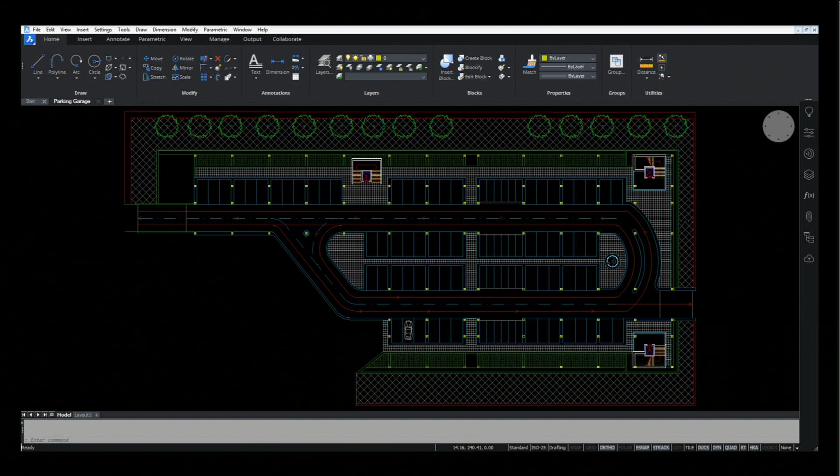It's dark, isn't it? Yep, dark UI, far and away the number one. Yes. I am a fan, I was one of the guys asking for that. Yeah, what we heard is, wow that's really white, or can you turn down the brightness? Your request is our command.

So you'll be seeing this demonstrated as Heidi and Hans jump in, you'll actually be seeing it in action. Other things we heard was that from an interface and workspace point of view, people wanted a familiar, easy to implement, easy to learn, and acclimate-to user environment. We're aware that a lot of people coming to BricsCAD are coming from other programs, so we want to make that transition simple. So Heidi was really a huge advocate for getting the new workspace environment set up and the different ribbon arrangements, and she'll be showing you that as she toggles through her demo. We really listened to that, implemented a new quick access toolbar, a new startup launcher, and a much more discoverable and easy to control quad input so that new users can be just as at home with it immediately as experienced users who already understand the quad.

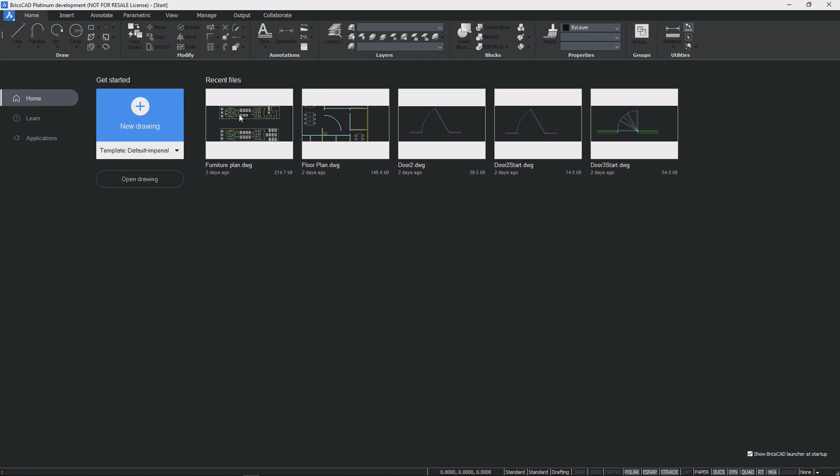I'll just go ahead and open up a drawing and take a look through the interface. As Robert mentioned, we've got the Quick Access toolbar up here, and this has the most frequently used tools that you will use regardless of which workspace you're working in. So a lot of just commonly used tools up there. And below that, you'll see the ribbon. So this is the default drafting ribbon, but we really have a default workspace for any of the environments that you work in. We want to make it easy.

One of the things that we learned from customers is that most of you are working in 2D right now. A lot of people still work in 2D, but you want to go to 3D and you want to go to BIM. So what we did is make it as easy as possible for you to move from 2D to 3D to BIM or mechanical. And what you see here again is the drafting workspace with all those 2D tools that you have in a core BricsCAD

classic license. But very easily, if you switch over to a modeling workspace, you'll see that you have a very similar UI with access to those 3D modeling tools, in addition to the drafting tools that you still need to create a lot of the 3D profiles and that kind of content. From there, you'll notice that we have some new tabs on this workspace, the BIM and mechanical tabs. Now, if you don't have a BIM, mechanical, or ultimate license, you won't be able to use these tools.

But you can see what's available, and if you choose to upgrade, then you can migrate pretty easily from the existing tools you were used to in a modeling workspace up to BIM or mechanical by just seeing the tools that are available in addition to what you've been working with in 3D. But for an optimum workspace, we of course offer you BIM and mechanical workspaces. These are optimized for those workflows. So it looks a little bit different, but it's got the tools that you need if you want to work most efficiently either in a BIM or in a mechanical type environment.

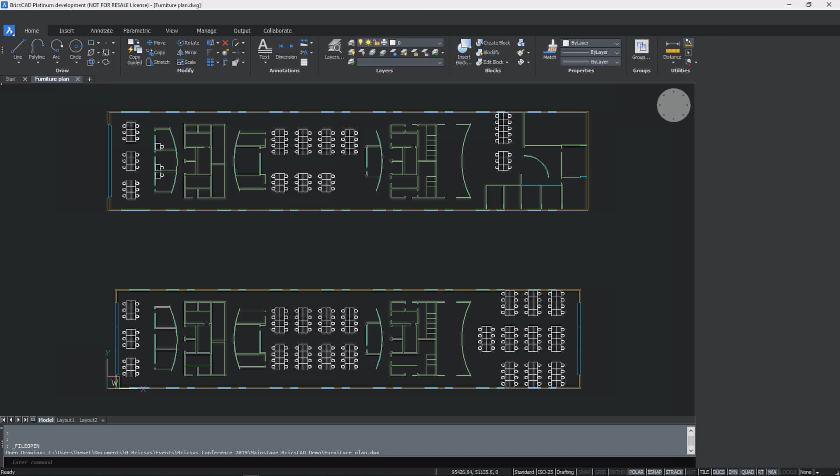By doing that, you can roll them up out of the way, easily access all of them, and really maximize your screen space. But it goes much further than that. For those of you that really want to maximize your screen space, you of course can use clean screen, turn off all your tools, and we have the wonderful quad available right there at your cursor. So this is really a heads-up design access to your tools.

They're context sensitive, so depending on the type of entity you pass over or where you are in your design or within your command, it will give you tools that are available specifically for that context. And from some users, we hear that they like the quad sometimes, but they want to turn it off easily as well when they don't need it. So we've added this little X up here; that is a huge request that we've had from users. You can just close that out and always turn it back on from the status bar.

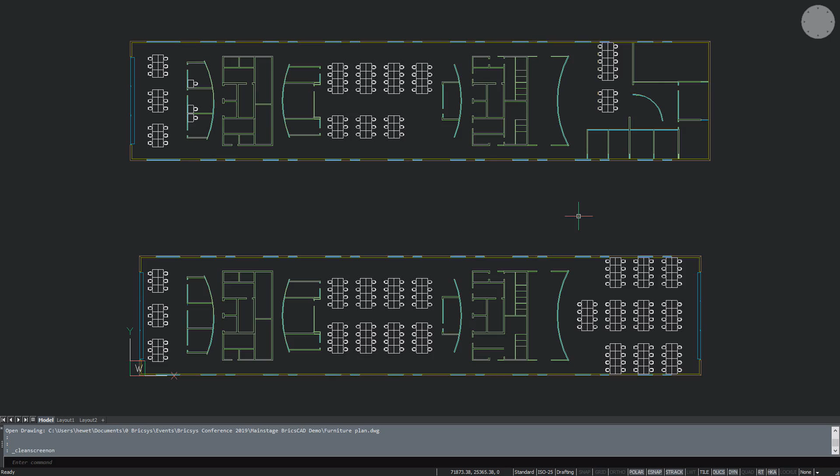So a lot of big and little enhancements that we've made, again, in response to the user feedback that we got. All right, so we'll hand it back over to Robert.

What do you guys think? Looks good.

Another thing that we heard quite a lot, and actually I think Heidi and I were kind of surprised as we went on some of the visits, is that civil engineering is a lot more important to most of our customers than we might have thought. What we heard was that whether we're moving dirt around on the surface of a construction site or moving mud around underwater in a canal or trenching something out in the North Sea, it turns out that moving dirt and computing basic volumes and having basic surface alignment capabilities and grading is something that was important to many customers. So some basic civil engineering features have been grafted into V20.

Now, is this a civil design suite? Will this allow you to design subdivisions or do analysis? No, but it does up the bar on the basic features that you'll have available to you in a BricsCAD license without any kind of verticals, without any expensive add-ons. Now, if you want to go the distance, then you need to come to the presentation that the guys from Civil Site Design are giving, because they'll show you a lot more about their solution. But at this point, I'll let Heidi show you what we've got up our sleeves for civil features. Great.

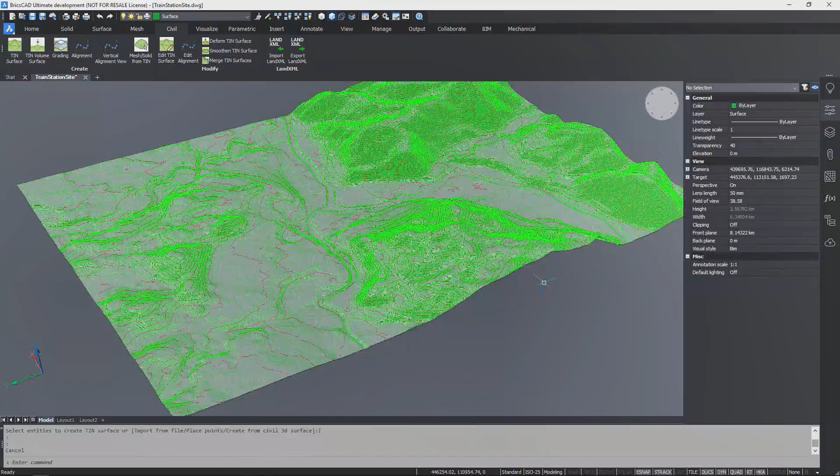So what you can do with the civil tools is you can actually create TIN surfaces. You can create those from a data file where you have all the points stored. It automatically creates the TIN surface, and you can use that for your model. There are various properties when you select that TIN surface that you can use, for example, to turn on contour lines. And then there are other tools for editing the TIN surface. In this example, what we want to do is crop the surface so that we add a boundary so that we see specifically the area that we're most interested in working on for our design.

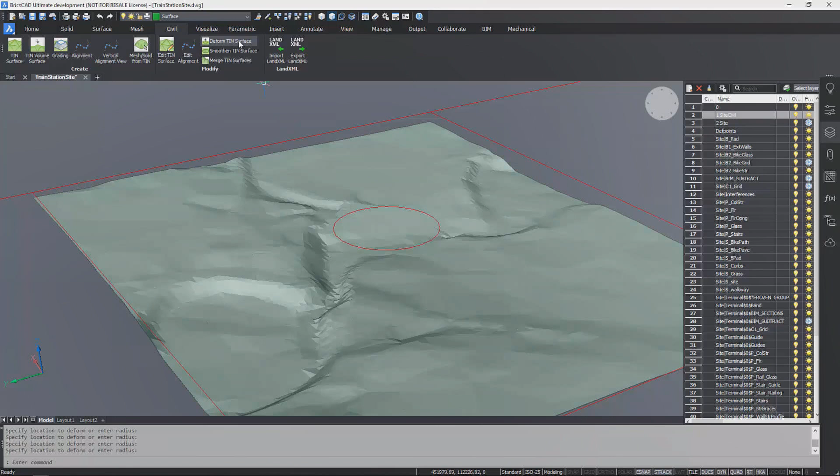Now here we're going to focus on creating a little pond in this area. So using the smoothen tool, we can very subtly smoothen out the area of our terrain to create that pond. And then we can use the deform tool, and as we specify the profile that we want and an offset for it, you can see as I pass the cursor over that it actually gives a preview of where it's going to go. So you can place it in the best spot, and then simply drag up or down to deform that surface.

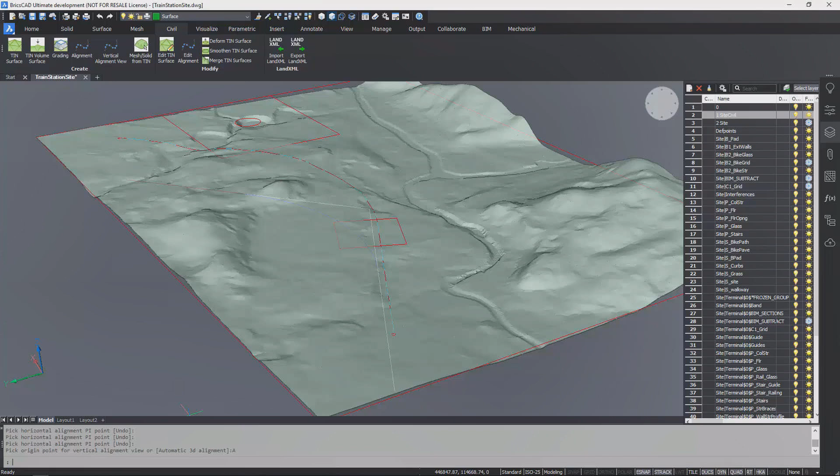There are other tools, such as the alignment tool, and in this example, what we're going to do is create a rail corridor for the train station that our architectural team is designing. And to do that, we can simply pick some key points for our alignment. By snapping to those points on our design, picking the start point, passing through our train station area and the end point, it automatically creates alignments, horizontal, vertical, and we can have it create 3D alignments automatically. Now these alignments are all linked together. So if you edit one, like the 3D alignment, the others automatically update.

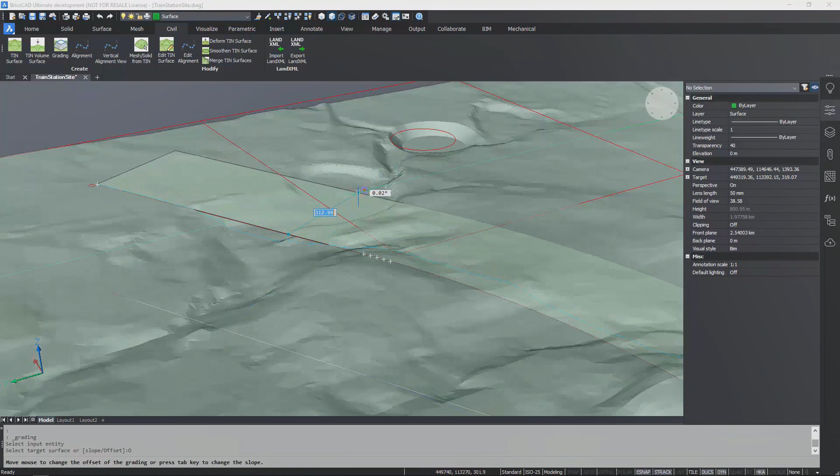And you can control various properties so that you can see and adjust the design alignment for how close it matches the terrain alignment, the actual surface alignment. Now, in this case, if we're designing a rail corridor, we probably don't want to follow the terrain too closely. We want our train ride to be smooth. So what we can do then is modify or create gradings so that our surfaces will actually be appropriate for our design. Here we're creating a grading where we offset the alignment to each side, and even as we create the gradings, we can still continue to edit our design.

We can change the shape of the alignment, and the gradings follow because they're all associated. We'll continue with the design, creating additional gradings, and we could create a grading that goes straight down from the alignment down to the terrain, but what we're going to do is actually create a grading that goes from our flat surface that we're using for the rail corridor and give it a slope that goes down to the terrain. And we'll do that on both sides.

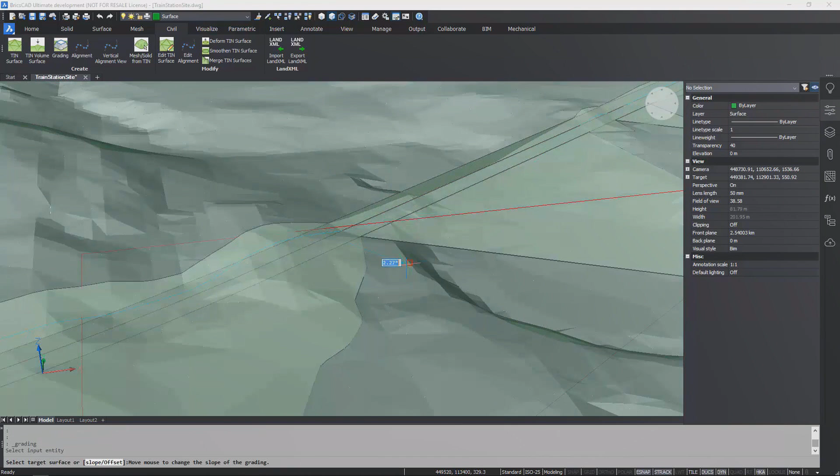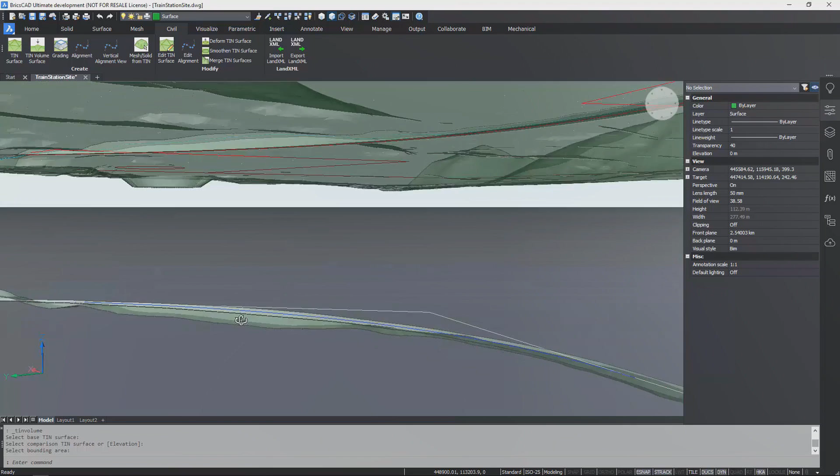And then once we have the gradings created, in this case, we can go ahead and merge those gradings together. So we have 4 different gradings all associated with the alignment. We merge them together, and then we can actually create a TIN volume surface between our design, those gradings, and the terrain. With that TIN volume surface, we can select it and look at its various properties, including the cut and fill volumes.

So a lot of power here, and this was just one example doing this rail corridor, but you can imagine using this, for example, as the platform for our building, our train station building, or many other projects, dams, and just about anything else that you could imagine in a civil type environment. And these are tools that are included with BricsCAD V20 with an Ultimate license.

Love it when the software works, right?

Another thing that we heard when we went out and talked to customers is that Heidi would always show Blockify and Parametrize, which are two of our kind of AI machine learning generation tools. And these were always very popular demos. And the feedback that we usually got was, wow, that's cool. Nobody else is doing that. That was the number one thing that was very nice to hear. And then right after that, what we heard was, what else? So what other cool things can you do? So that sounded like a challenge to us.

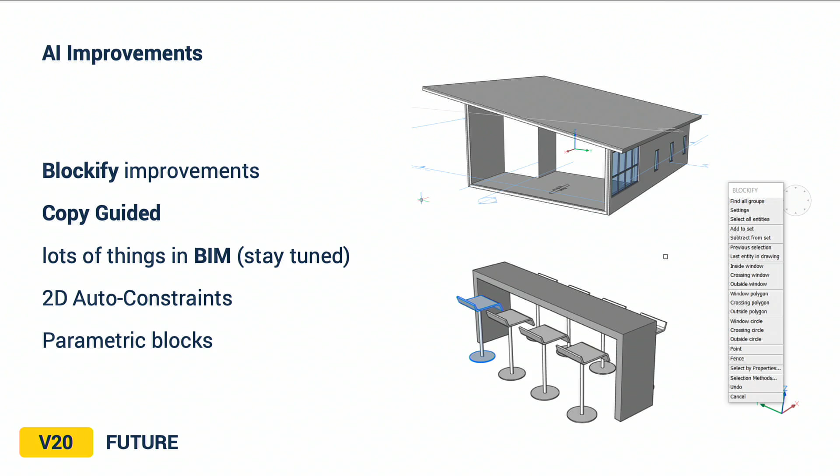Challenge accepted, right? So Heidi is going to be showing you some Blockify improvements and a new feature called Copy Guided. And we're also going to take a look at some futures, some things that we're working on. They're not all the way baked yet, but they will be pretty soon. So we want you to take a look at that. So Heidi has a couple of demos that she's going to show you. And I'll go ahead and get out of the way and let Heidi show you around.

Great, thanks, Robert. Yeah, I do want to emphasize that, as we were meeting with customers, again, many of them still work in 2D. So the 3D functionality is really cool, but we don't want to forget, and I think Eric mentioned that as well, we don't want to forget about 2D, and we want to make our users as comfortable and productive as possible. So again, from our user feedback, this is some of the things that we're able to offer with V20.

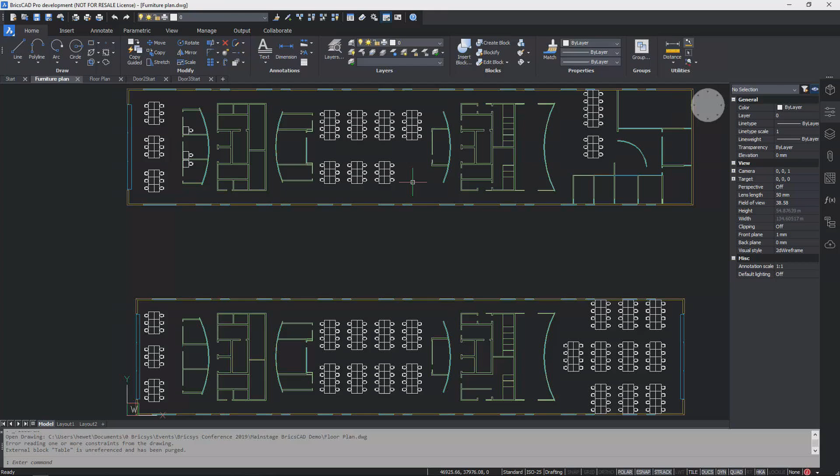In this case, I have a floor plan, and this floor plan right now has some geometry that represents desks and chairs. And if we look closely, you can see that these are individual entities. They're not blocks right now. Looking at the properties, you can see that the desk and the chair are composed of 18 different entities. If I select similar for all of those, it's over 4,000 individual little entities. So the drawing's a mess, and that's not good drawing practice.

What I'm going to do is just use Blockify and take all the defaults. So very simple for me, I don't have to think too hard. Taking the defaults now with V20, BricsCAD actually looks through the drawing database, the block database, and if it finds a block definition that matches that geometry, it automatically replaces all that geometry with those existing block definitions and instances. So really powerful functionality there. But it goes even further than that.

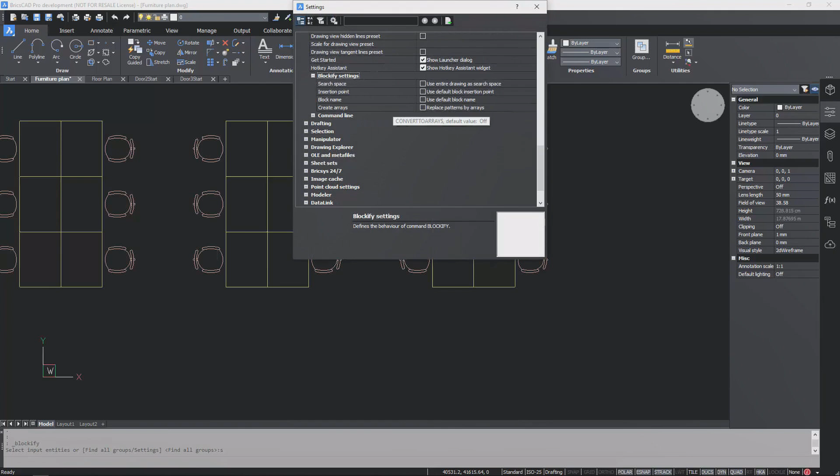Right here, now we've got these two individual blocks, the desk and the chair, that it created automatically. What we can do is use the Blockify tool again, and there's a setting in it that lets us detect patterns for arrays. So if we enable that setting, then selecting just a set of these desks and chairs, I'll just select 2 of the desks and 2 of the chairs. Doing that, and taking all the defaults from there, BricsCAD automatically goes through and looks for patterns that match those 2, and it generates arrays from there. So very quickly, it's able to find those patterns.

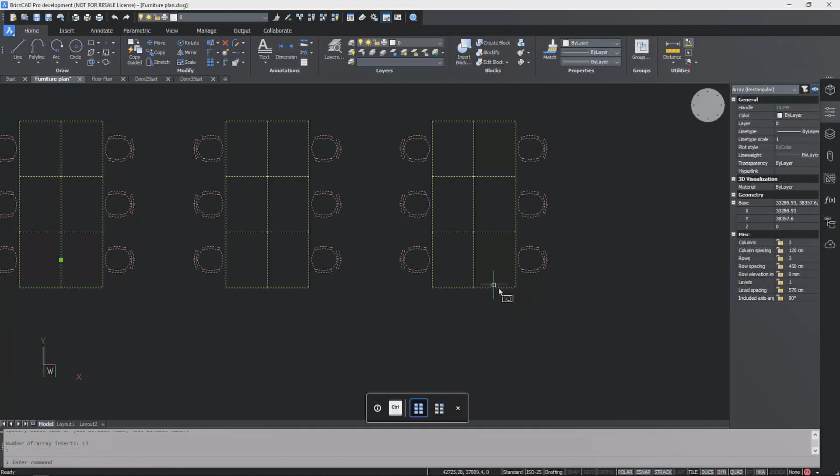If I select that, it doesn't look any different, but now I can see when I select it that it's actually an array, and it has the properties of an array, as if I had created it manually, but it did it much quicker. So I can change the values, maybe increase the number of rows and columns. And again, saving me a ton of time. If I had to clean this up all myself, it would be quite time consuming. So those are some enhancements to Blockify, which was my favorite V19 2D tool.

Now, I think in V20, one of my favorites is going to be this Copy Guided. By the name, you can tell that it's probably something to do with copying entities. And what I'm going to do is select this chair, and I want to copy it to other locations. Anything that falls within my selection window is copied, but anything that the selection window crosses is used as guidelines. So you can see here, by simply moving that chair around, it's automatically snapping to similar entities there. And it even snaps to the arc entities.

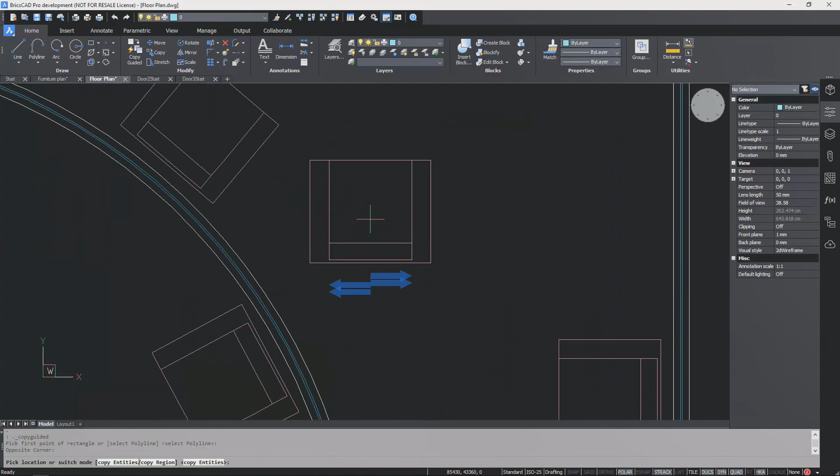Now in this case, when I created that selection, I crossed over the wall, which included 4 lines. And let me just point out, it's just lines. These are not BIM entities. These aren't walls. These are just lines. It could be in a mechanical drawing as well. But it had 4 vectors, 4 lines that it passed over. So when I try to pass it over other entities, it won't snap unless they match those same lines.

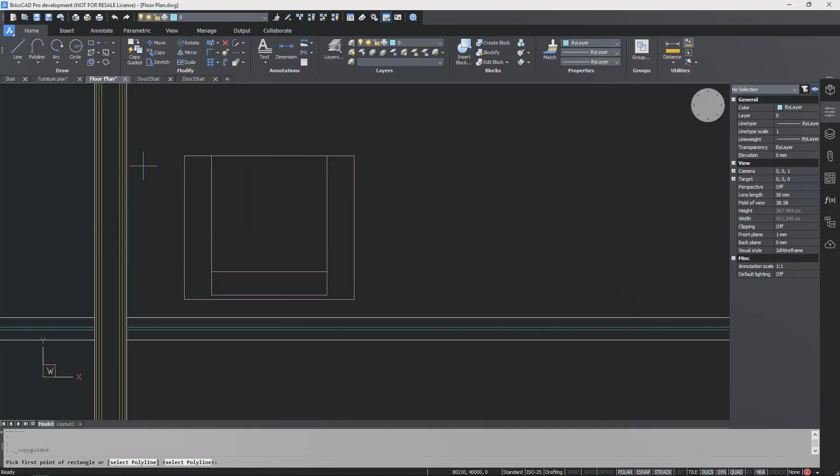But I have more flexibility if I simply select differently. In this case, I'm doing copy guided and only crossing over 1 line. Now I've got more flexibility, and any line that I pass up against, it's able to automatically snap to. So there's all kinds of things you can do with copy guided. I have to show you more examples because I was having a lot of fun with this.

So over here, we've got a door, and actually this just happens to be geometry. It's not even a block. It could be, but it's not. Using copy guided, I'll do my selection window around that door area. And again, it detects the guidelines. And as I pick to place the door, notice that it's not only copying the door, it's actually trimming the lines away automatically. Again, this is just plain old geometry. There's no intelligence. It's just geometry, okay? Which is great. That's a lot of fun.

But then, to make it even better, what if you erase those doors and now you want to repair those lines? You can use copy guided. There's a region option. So if you just select what you want to replace it with, which is, in this case, a bunch of lines, and then specify the region option, now, as I pass over that same kind of geometry again, it snaps to those guidelines, and it erases the door, and it cleans up those lines. Okay, that's pretty cool. I had a lot of fun with this.

Okay, one more example to show you. Okay, yeah, you can clap.

Okay, last example I want to show you is here we've got an opening, and on the other side of the room, we want to reproduce that opening. Using copy guided, I'm actually crossing over the corner of that room and selecting that whole opening, which again is just lines. And then notice that it's got more vectors. Now it knows that it's a corner, and it automatically snaps to a corner. Super intelligent, minimal work for me to do, no thinking involved. All right, that's copy guided.

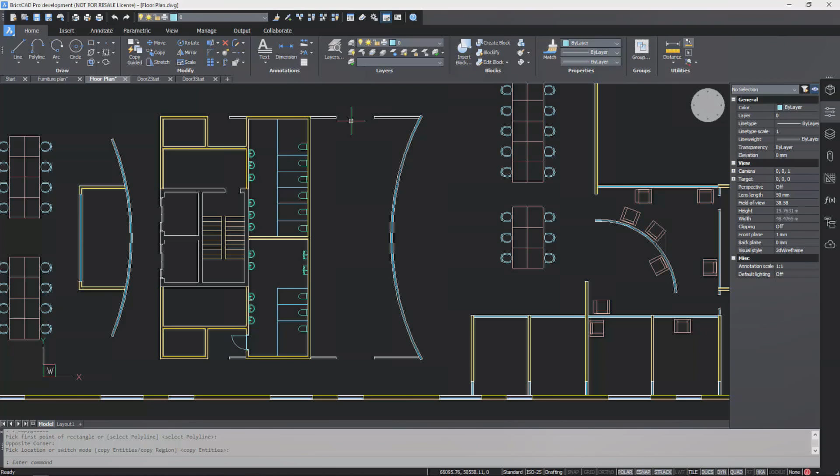So everything I showed you so far is in V20. You'll see that and have access to that very soon. The next thing I want to show you is the parametric functionality. So this is beta functionality. It's something that we're looking to in the future, not available right away with V20, but I do want to give you a look at that.

Okay, so here we've got a door symbol, the geometry to make up a door symbol. And what we want to do is just turn this into a block. Right now it's just lines, arcs, polylines, okay? So using the parametric block tool, which might look a little familiar to you, you can enter the name of the block and select the entities that you want to belong to the block. But you'll notice on the right side that there's additional tools specifically for parametrics.

What I'm going to do is select guidelines here, similar to what we saw with copy guided. And then I'm going to use the auto constrain option. Using auto constrain, it knows now, because it knows that it's got parametrics with it, it adds it automatically to the parametric block table.

In there I can either open or insert blocks from that panel. Here we can see all the parameters that it automatically added to the block definition.

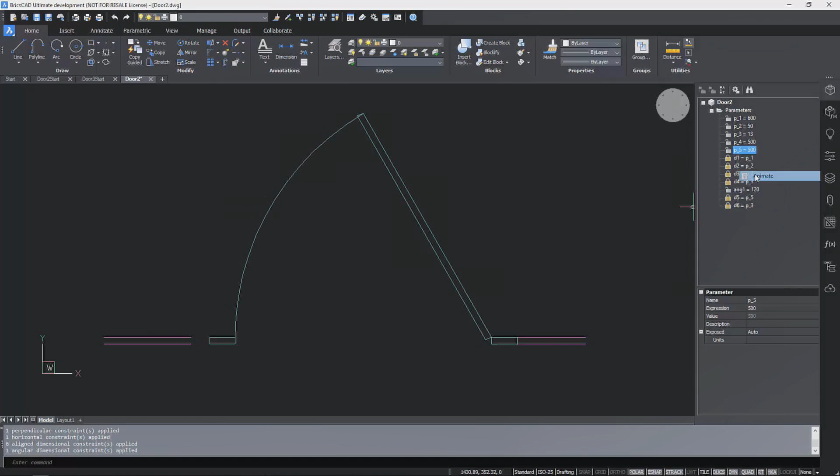And then I can animate those to see how they behave. If you look at the ends of the doors and where the door meets the guidelines, as I animate, you can see that there are actually some things that it's missing, right? It's some other parameters that are applied, and it missed the ones that I want.

You have complete control, and with the animation, it's very easy to see what you might need to add. For example, I saw that there was no perpendicularity between the ends and the sides of the door, so I add a perpendicular constraint, and then just add a fixed constraint to make sure we know a stationary point within the block. And then there's other things that I can do.

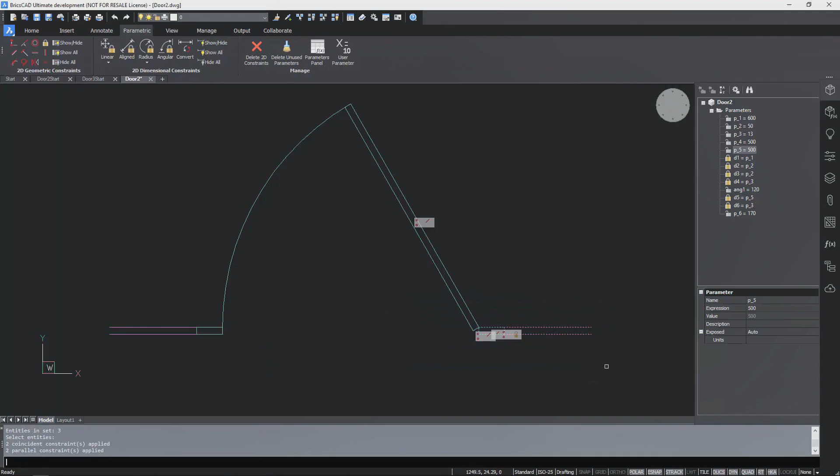I can always use the auto constrain tool and add automatic constraints again. If those constraints would over-constrain the drawing, it will give me a message that some of those constraints couldn't be applied because it would over-constrain the drawing.

You can always go through and look visually at what constraints are applied, and you can add and remove them manually. Or if you add more geometry, you can add constraints. But what's really powerful here is the ability to see these visually within the drawing as well as in the parameters list, and to be able to animate those.

You don't have to insert the block and then test it out in your drawing. You can animate it within your parameters panel and see what needs to be done.

So here we see that we're getting closer. We've got the door width working, and some of those parameters with auto constrain weren't applied until we removed some of the parameters we didn't want, and now we reuse auto constrain, and it knows enough not to apply constraints again if they're already there.

Again, animating, and now that block's looking pretty good, and I never had to go out and test this block. I just animate it. Now what we can do, I'll just add one more constraint here, and that's for the angular constraint, where I want to create that for the door swing.

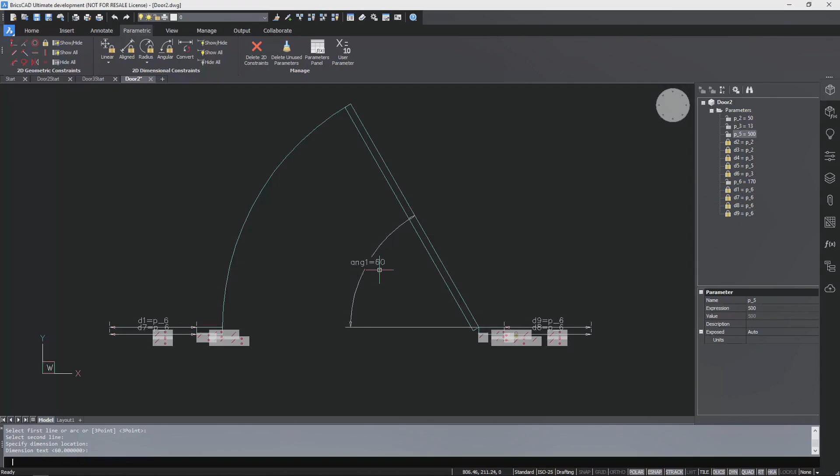Now, it comes up with default names like Ang1 or P2 or whatever, but I can give those meaningful names. So I'll just call that swing for the door swing and width for the door width.

You can go through and control the visibility of these parameters as well, because as you can see here, I've got a lot of parameters, and those might be a little scary, and you don't want your users, especially if you're a CAD manager, to modify all of those.

So there's properties here in the parameters panel where you can change which ones are exposed. For example, some of these parameters that control the thickness of the door or some of the other properties, I don't necessarily want anybody to change, so I can turn those off so that they're not exposed in the actual block definition.

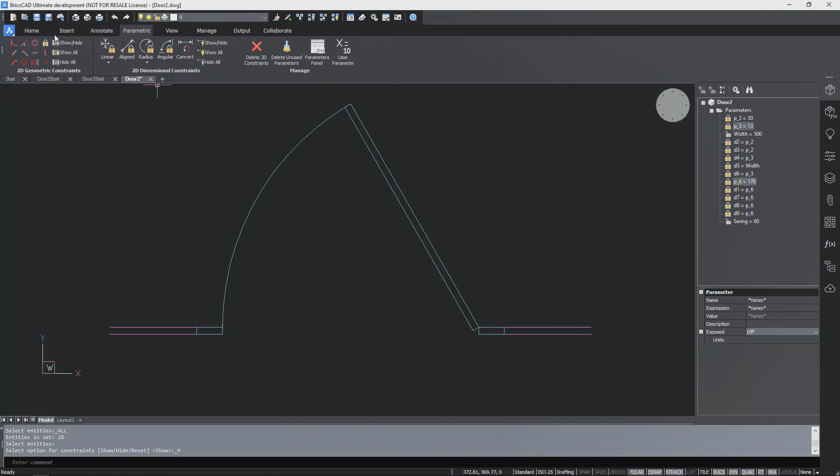Once you've got your block set up just the way you want, which is easy again to see by animating it, you can go ahead and open up your drawing that you want to insert it in, and very easily from that parameters panel, you can drag that block over and insert it into your drawing.

So looking over here, we see the block definition. Simply drag and drop it into the drawing. Those guidelines, just like we saw with copy guided, help us easily place the block.

And then we can select and modify properties of individual blocks, or because we're doing this within the properties panel, we can also select multiple blocks at the same time. So here we can change the door swing. That was the one block selected.

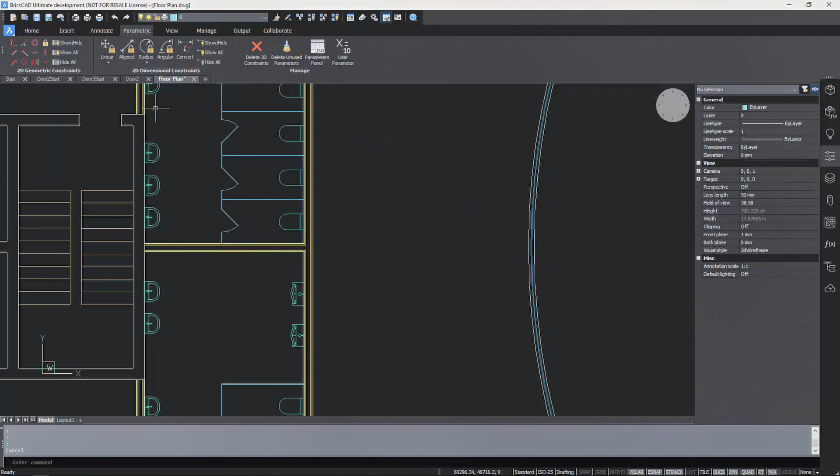Selecting multiple blocks and going to the parameters, we can change all of those door swings at the same time. And the same with the width as well. That's one example of creating a block definition. That was using auto constrain.

I'm going to stay in this door theme, but even though I'm talking about architectural drawings here, this can be done with any type of 2D block. Right here, we've got a different door, and instead of using auto constrain, what we're going to do is use flip and visibility constraints. Using the parametric block dialog box, we create the name of the block, and then I select just the entities that I want displayed in every visibility state.

And then guidelines, just like we had with copy guided, we'll specify the guidelines. Now I can very easily add flip constraints, and I could remove, maybe I want only horizontal or vertical, and rename them to something more meaningful. Then I can very easily add visibility states and give those meaningful names.

For example, I want a swing visibility, so I can control the door swing, the visibility of those different swings. I select which entities belong to each of those swings. I've got a 90-degree swing, a 60-degree swing, selecting just the entities for that particular visibility state. Then I can go on down and do the 45 and the 30 and a closed one as well.

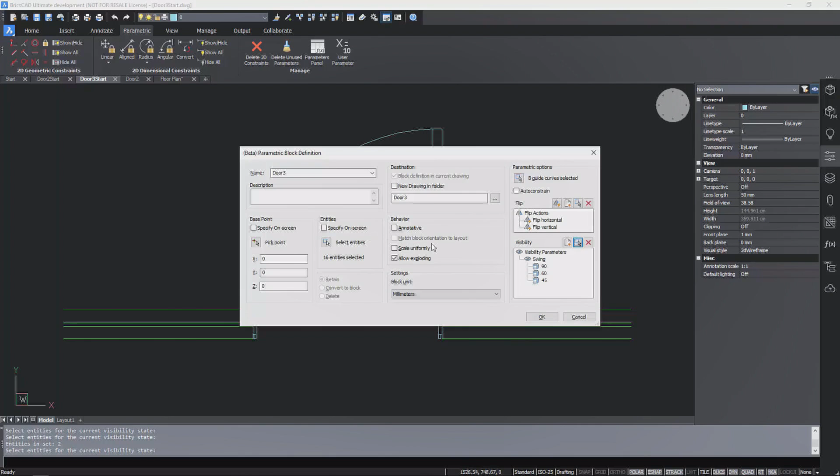So this is just a different way. We had a block definition, the one we created before, that used parameters where we could enter the degree value of the swing. But imagine any kind of block where you have visibility that you want to show. You can do that using these visibility states.

Doing that, again, saving that, it automatically adds it to the parameters panel, and I can drag that new block definition into my drawing. With those guidelines, it automatically snaps. And again, I can select those.

Now you see, because we have flip states, we see the graphic indicating that we have flips. If we look at the properties for that, we can visualize as we pass over the different options in properties, we can see it flip either horizontally or vertically. And then also the same thing with those many swing visibility states that we added.

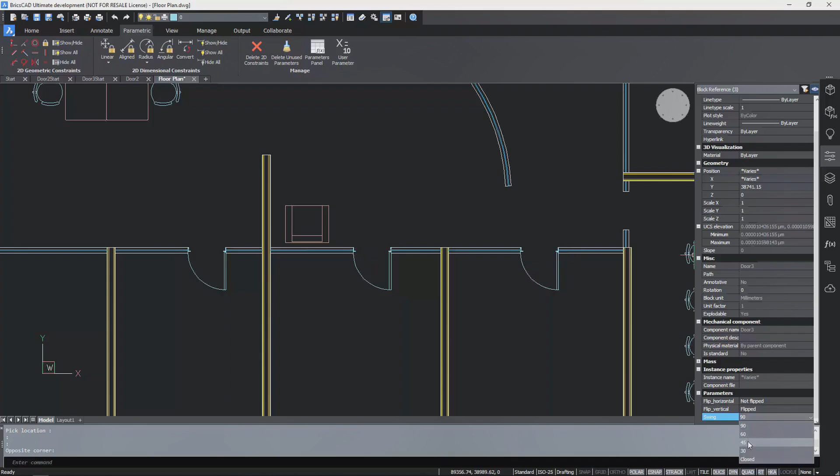So just a whole different way of doing it, but easy, really intuitive to use. All right, that is a quick look. Again, that is preview functionality. This will not be in V20 when it ships, but it is something that we are looking at and is coming our way.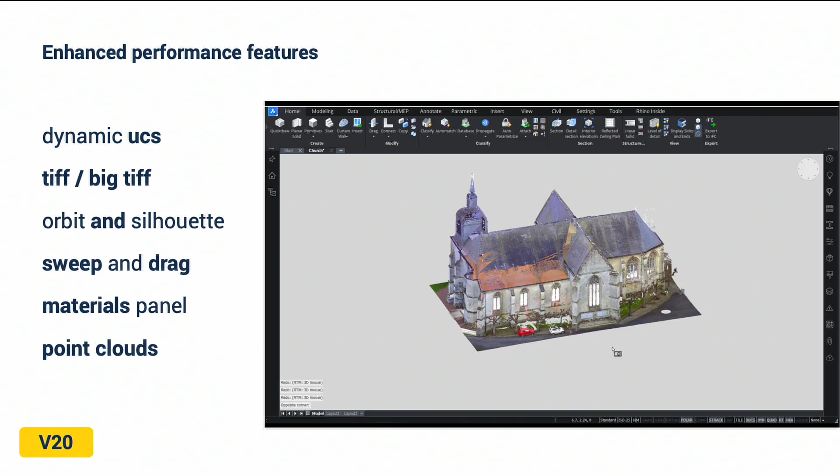Of course, these were kind of the cool, showy things that jumped off the screen, but for a CAD engine to really work well, there has to be a lot of internals and plumbing and fundamental classes of technology that need to work. And you're going to get a look at some of that in a big way right now, as our head of core development, Hans de Bakker, is going to take you through a variety of demo scenarios that I think you're really going to enjoy.

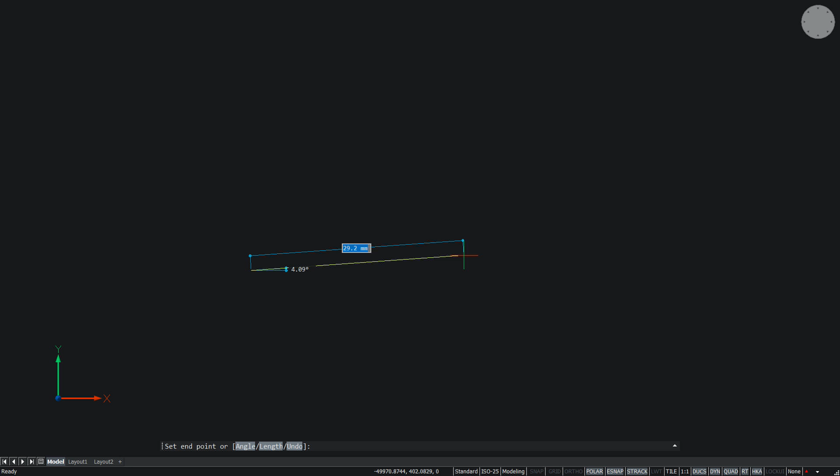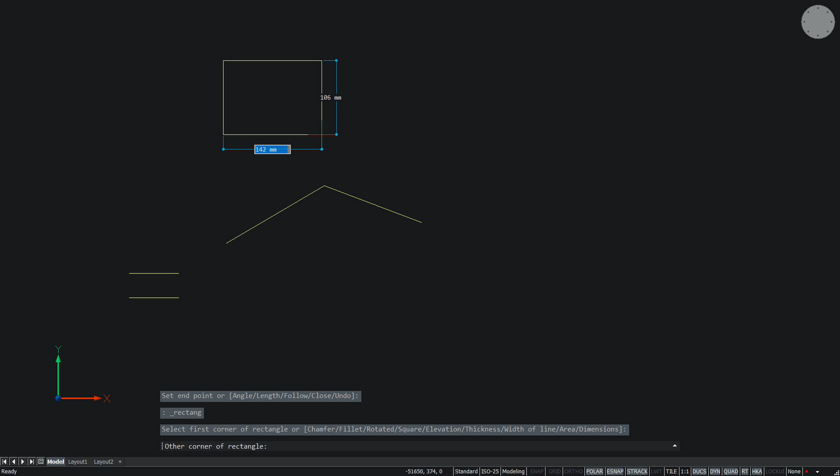That being said, let's draw 2 lines. And what else can we do? Basic stuff. Well, how about a rectangle? Now, if you draw a rectangle, again, you have the same tools.

And that's all very fine as long as that rectangle is aligned with your main axis. The moment you want to draw something aligned with this, then either you need to fumble with snapping settings that you change, or with installing a UCS. But often, looking for improvements, it's not rocket science. Often it's just a natural extension. Those are the best improvements that you can find.

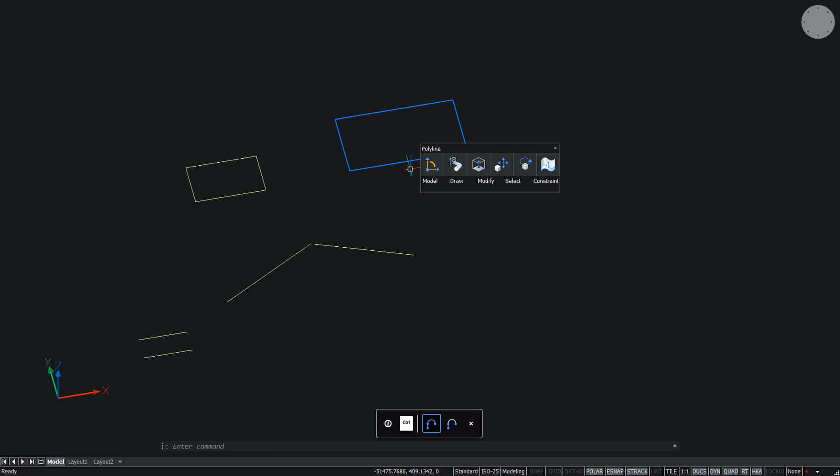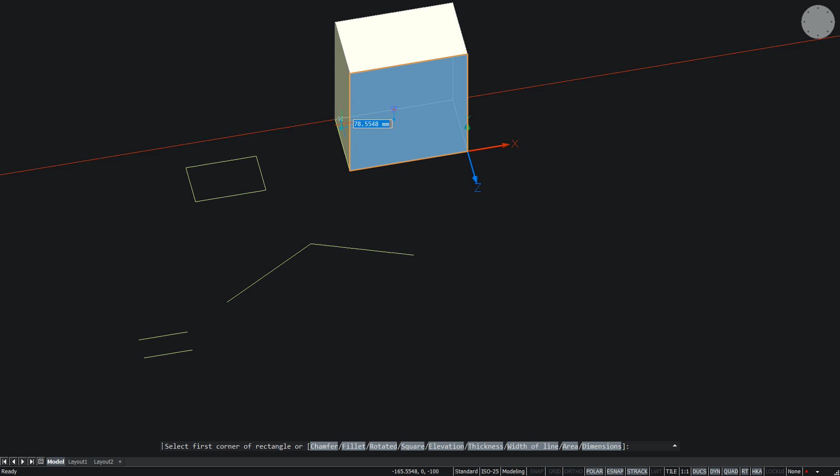Now what you can do when you draw, for instance, a rectangle: if I hover this face, you see it lights, and I can lock it. It's my UCS that's being locked. I can unlock it by tapping it again. But I can draw on top of that face, and I can draw on other faces that I also can lock. You see it become blue, and then not blue when it's not locked again. So here I draw on the side face.

Now, how about if we could use that same technology in 2D? Let's give it a try. So we extended the dynamic UCS and now allow it to be applied for other entities. So we again draw that rectangle, and now if I approach this line, you see the UCS triangle that is being depicted. This is a temporary dynamic UCS.

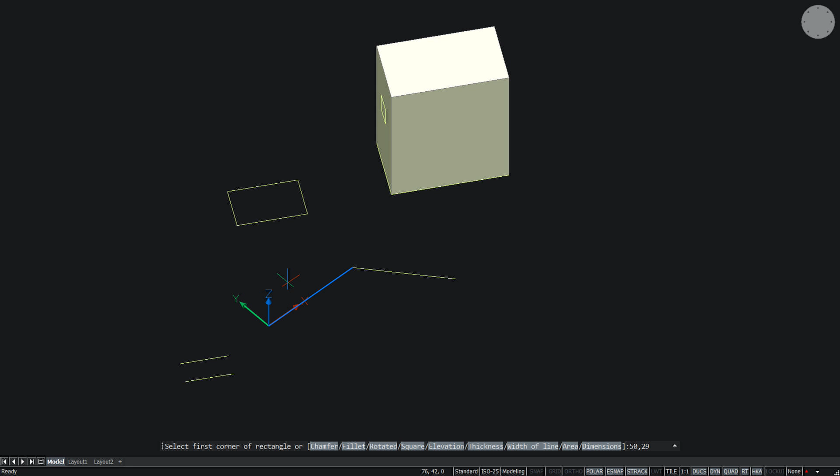If I hover here, this is my temporary dynamic UCS. So I can just approach the entity and draw the thing I want. I can also lock it. So here I can move away my cursor any place, or once it's locked, I can key in values, like in this temporary coordinate system, say I want a value 50 by 29, whatever, and I start drawing. So dynamic UCS now is available for any kind of entity.

As I said, it's often in the simple things. So how can we save time for you? For instance, if you want to know what is the location of this vertex, well, as you see, I just highlight it, and the moment I highlight it, I get the position of this vertex. There's no need to start a command like ID or whatever. And in fact, the best commands are those that you don't have to pick on some menu or a ribbon, they are always there at your fingertips.

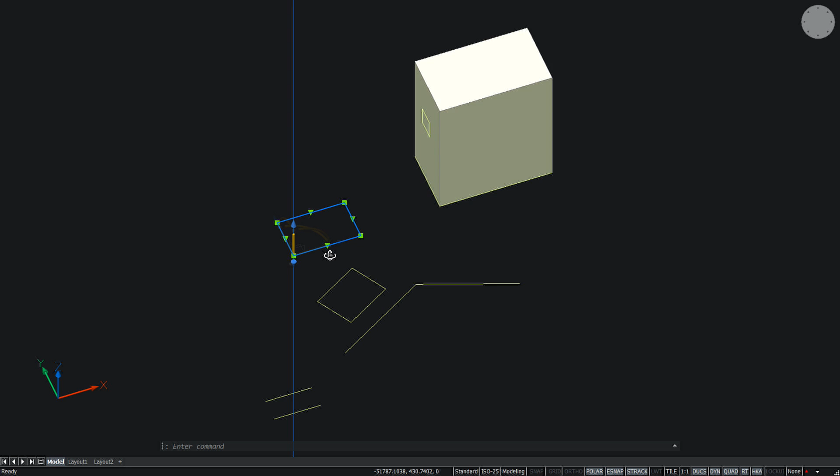What are the 4 most frequently used editing commands in CAD? Well, they are commands to move, or to move freely without restriction, which is newly added. They are the commands to rotate, and there's mirroring. Now, did you see that in fact I didn't start any command? I only, instead of selecting with a short click as I did, selected by clicking just a tiny bit longer.

And wherever I want these 4 most used commands and I need them, I have them immediately. I don't go to the ribbon to pick it. The best commands are the commands that you never enter.

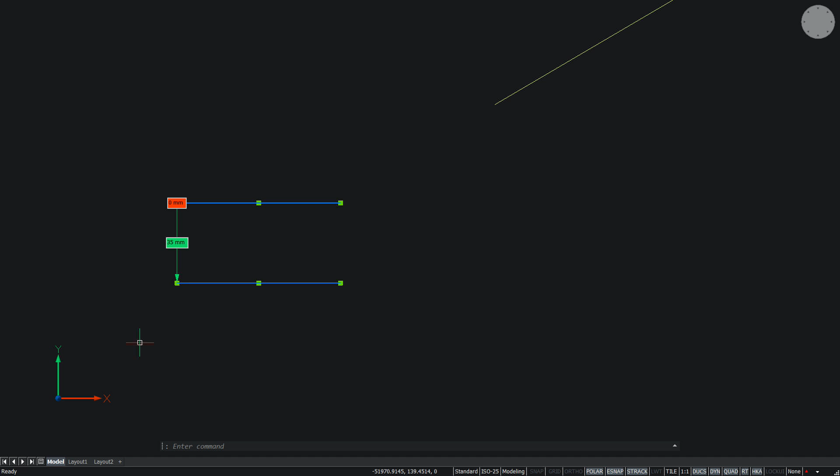And along a similar vein, another example of the best commands that you never enter is like nearest distance. Whenever you select 2 items, we show you the nearest distance. And we have improved it, so now the green value is the one along the y-axis, the red value along the x-axis. What happens if I move entities? You see, these values come along, and now it shows me that my x value is 21. I could move my entity until it's in the location that I want to use, and every time check back.

But you know, this is not simply information that we show. This is, again, a command. This is the move command, but in a very refined way. If I want this distance to be 50, then I just key it in. If I want this distance to be 100, then I just key it in. It's as simple as that.

It's always there, available. So we look at the basics, and you can use this wherever in BricsCAD, wherever you're working.

Also in 3D, I select this line, I select this top face, I get these distances. If I want the height to be 200, that's how much time it takes.

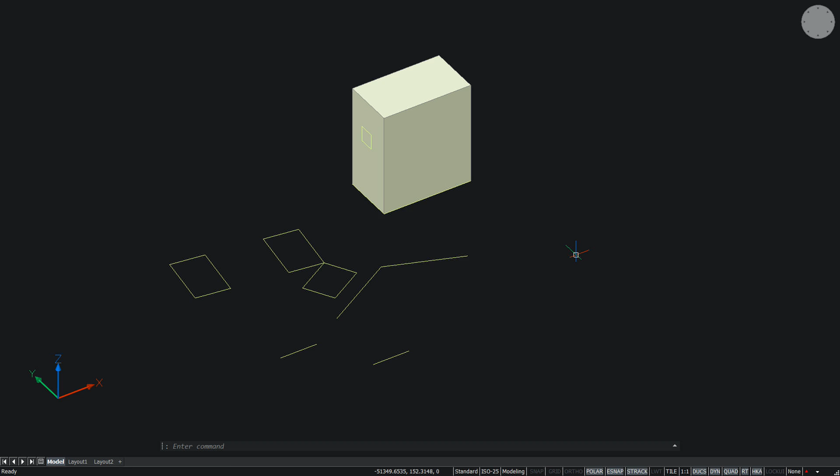Very convenient, this tool. Now, of course, you're not always drawing with just a few tools. So performance is also important for ease of use. And for performance, I will use a bigger drawing.

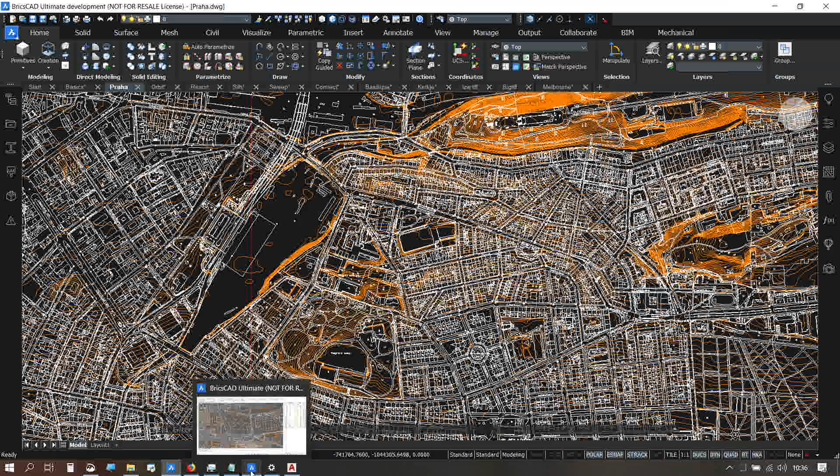Let's look at how it was in V19. This is really a huge drawing, by the way, containing 500,000 entities. So if you redraw that, you need to draw millions and millions of line segments before it's there. And that's also what happens if you want to move such a huge amount of stuff. You select it, and it indicates in the corner that it has selected 500,000 entities.

Then I pick a point, and this is V19. Now you see the dynamics that are being drawn, and it's very shaky. And now my cursor is stuck. It's really inconvenient if you have to draw like that.

So let's have a look now how this is done in V20. We worked on that. So also we zoom out, and we start the move command, select the bunch of lines, and all of the city of Prague is selected. And now we start moving it.

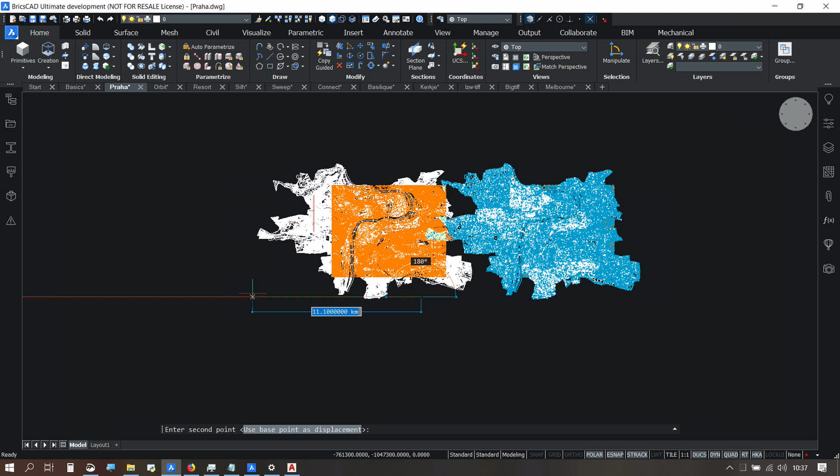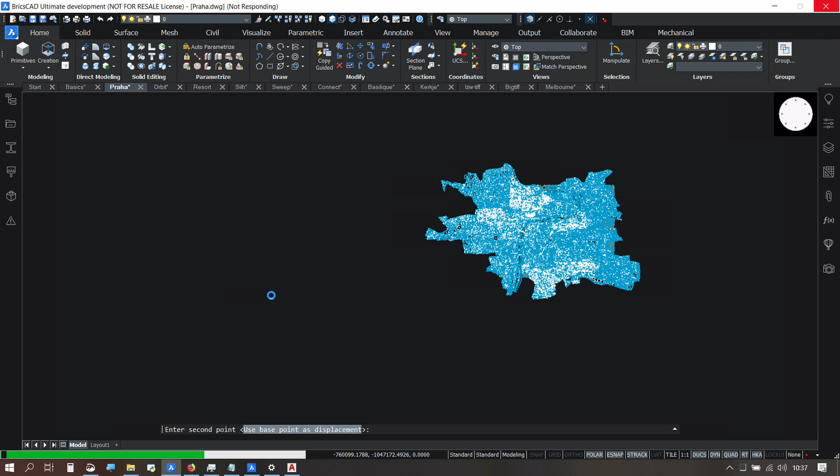Look at how smooth this goes. I can move it anytime, any place. Shall I move Prague a bit more to the left, dear? So now with V20, no more worries. Next time someone asks you to move Prague a bit more to the left, you say, why, of course. It's there. No problem.

Other things that may help you is if the orbiting, the tools that you use just to orbit your view on screen, if that works convenient, if it works as you expect, that's what it's all about with software. It has to work predictably, as you expect it to reply.

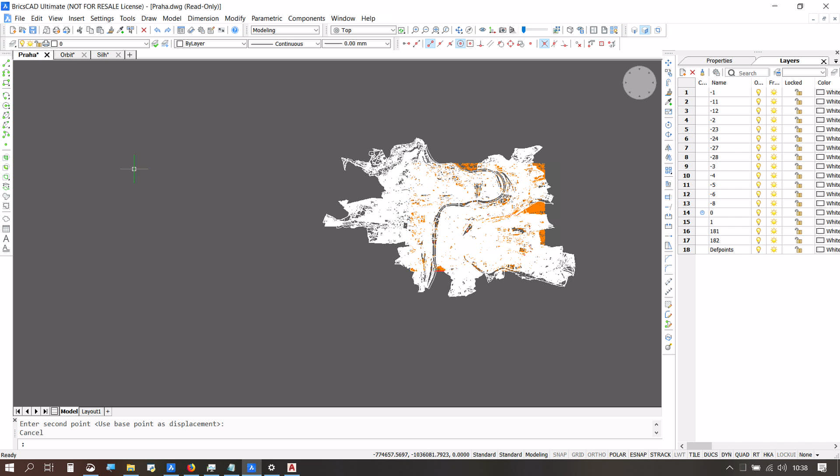Now, the difficult part here was that if you point in empty space. Let's have a look at how it behaved in V19. If I click in empty space and start to rotate, everything's gone. That's not predictable.

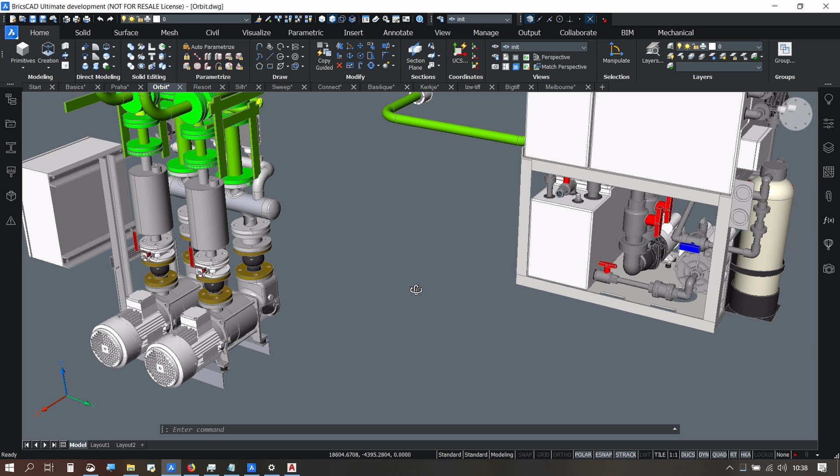So let's go back now to V20. I'm in empty space, and it is as if there's some virtual point there that I can rotate about. It really helps you, and it saves you time. It makes it more pleasurable to use.

Other things that help, we are always looking for how can we improve the user experience. Users have been asking us, I think it's the most frequently requested feature ever, Viewport Maximize. What it does is that if you click in a viewport to activate it and start zooming, the scale is changing. And that's not what you want. You want to keep that scale.

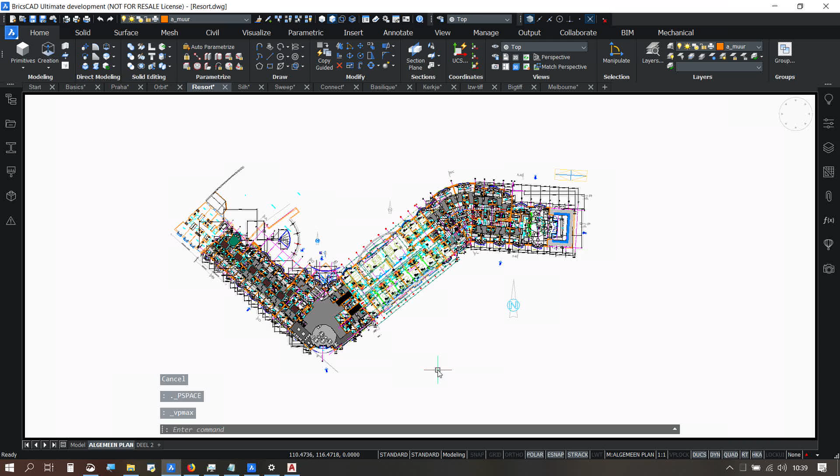Okay, you could lock the scale. We have added a tool, by the way, to lock the scale. But that has other inconveniences which you want to avoid. So instead, you just double-click on the border, on the boundary, and now you can work on the item that you want to work on. And if you have finished, then either you click again on the boundary here at the side, and you see that the original scale is preserved and restored.

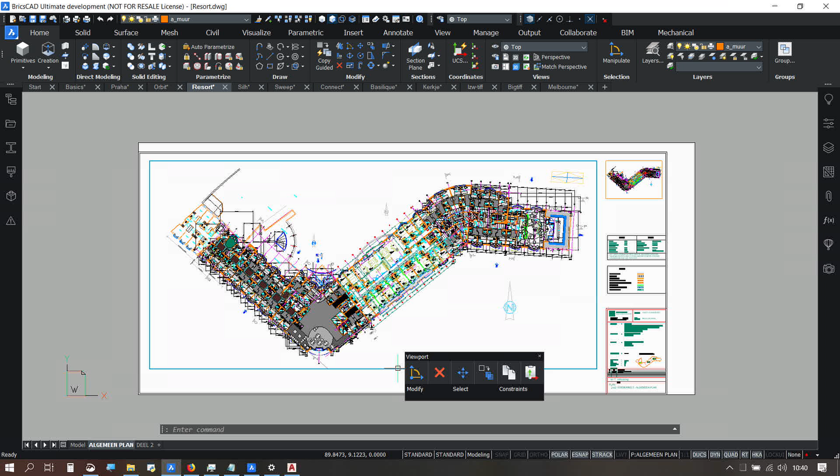Other ways to do the same: you key in, and then from the right-click menu, there is Minimize Viewport. But this is a very handy tool, so we are adding those handy tools.

And because performance is important, we often work on performance. Here we worked on performance of silhouette lines. And don't get fooled, this is a heavy drawing, because you see I've created a forest of these things. It's thousands.

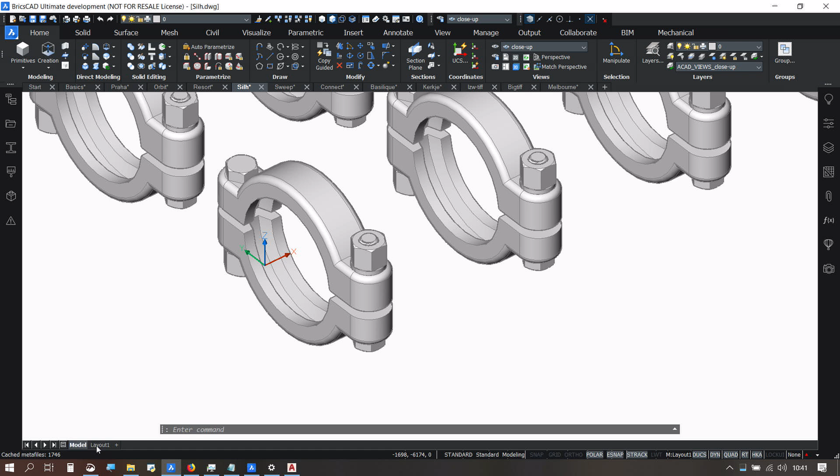But it helps to illustrate: in V19, if you had this view and wanted to switch to a layout view, you see I get this blue wait cursor. It's lovely, but after a while, you've had enough of it. So in V20, look at the speed of switching back and forth. It's like 1 second. And that is while the other version is calculating.

So let's go back to V19. It's still crunching. Now we're there. So I think there's an improvement.

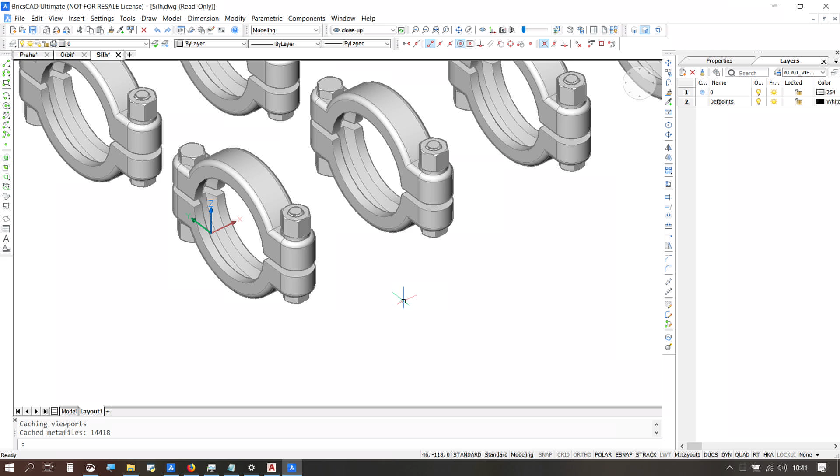For sweep commands, well, we try to make them also more user-friendly by making them more direct modeling, so that you get immediate feedback of what you're doing. Much like if here you are push-pulling this face, you get immediate feedback. That's nice to work. That's what you want. So let me just activate another snap.

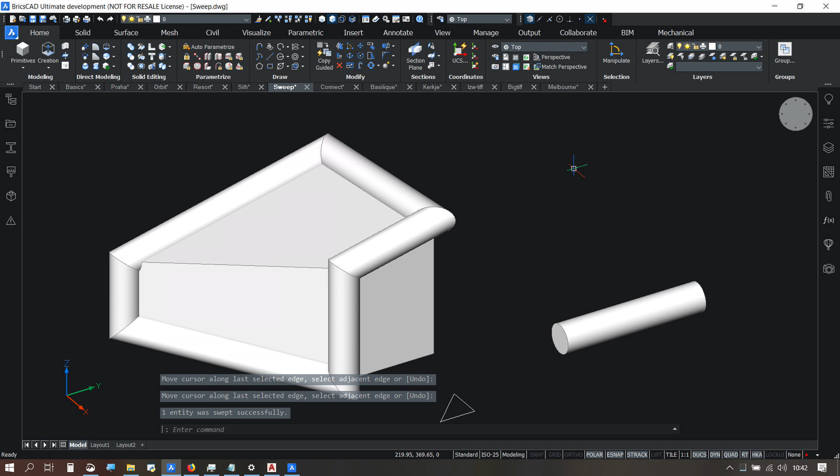And here with this same face, let's now use this new tool. It's a new variant of sweep. It's interactive sweep. And I want to sweep, let's say, along this edge. You see, now I can really control that sweep as I go. And as I go further, I control how it continues. And I want it to go this way, now I want it to go that way. Let's go up again. And now as the finishing touch, you see, it creates this mitre at the end. Not bad. So that's the new sweep direct modeling variant in V20.

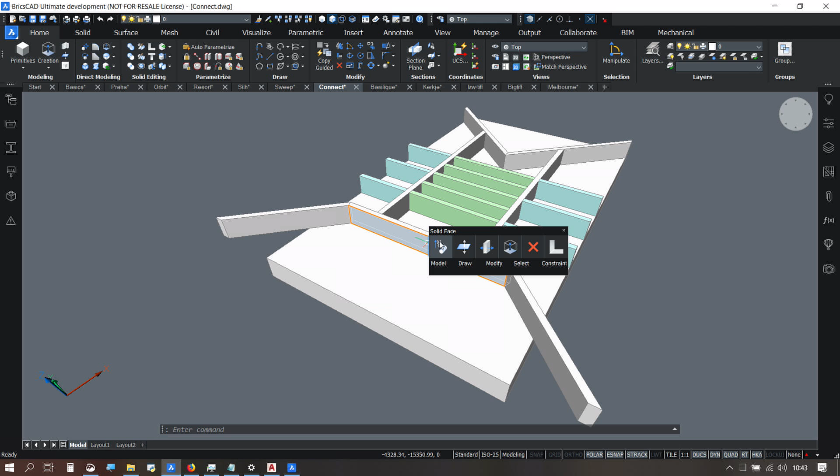Now, this year in V20, there's a present. There's a present that we received from the BIM team. And everybody who has a Pro license now can use this BIM functionality. The functionality I'm talking about is this one. It's drag. And what it does, it allows you to drag solids in a connected way. Or if you press the Control key, in a disconnected way. Control key again, and I have it in a connected way.

Same thing here. Watch the green solids, they have shrunk. The blue solids have become longer. These are just ordinary solids. The only thing is they touch each other. That's enough to get that functionality. Here the same thing with that wall. Watch the connections. You see the connection at the top here goes along. This mitered connection goes along.

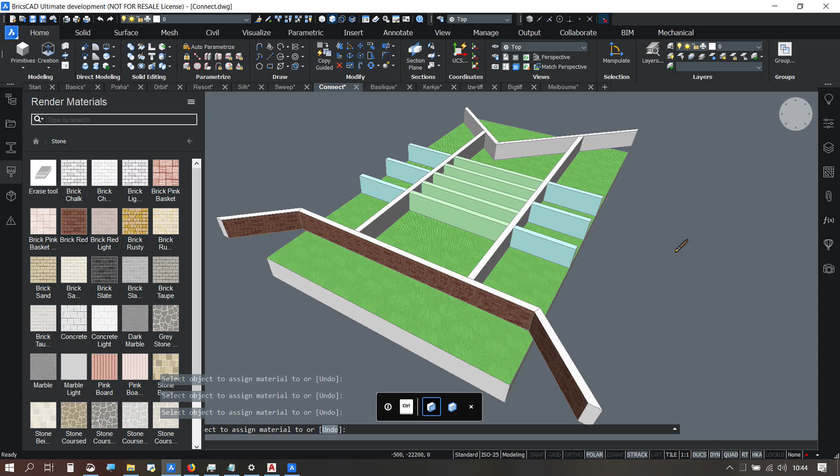Now, as we got this present from the BIM team, our shape team could not stay behind, so they said, well, we'll throw in the render materials panel. And also, at the same time, some nice material definitions. So all you have to do is click and drag, and you let it drop. And that's all you need to simulate. If you want to do the same thing for the wall, or if you don't like it, there's this erase tool that resets your material definition. So yeah, there's a nice present that we got from the other teams, all available in the Pro license.

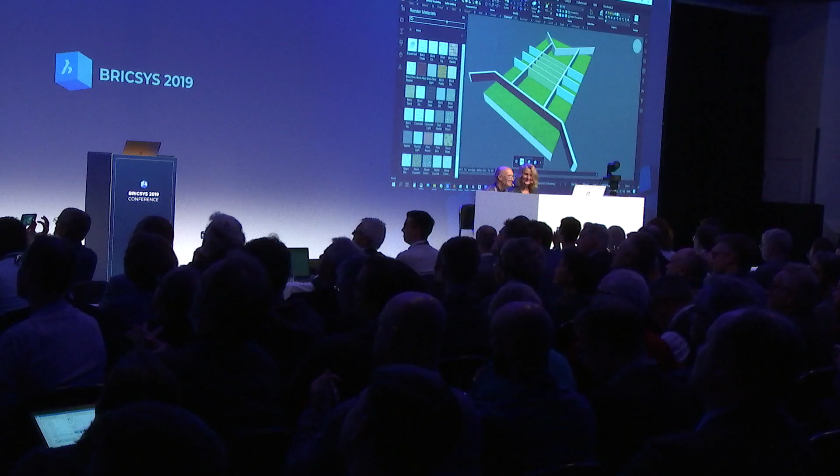And when we are talking about the way that things look and their shape, then we come in the neighborhood of point clouds. And point clouds, we get more and more requests for that. So we've been working on that. Notably, one of the things that we've been working on is better cooperation with our competitors. Here, this is AutoCAD 2020, and I'm loading a point cloud that is processed for AutoCAD. It's a ReCap file. And in BricsCAD, we have switched format.

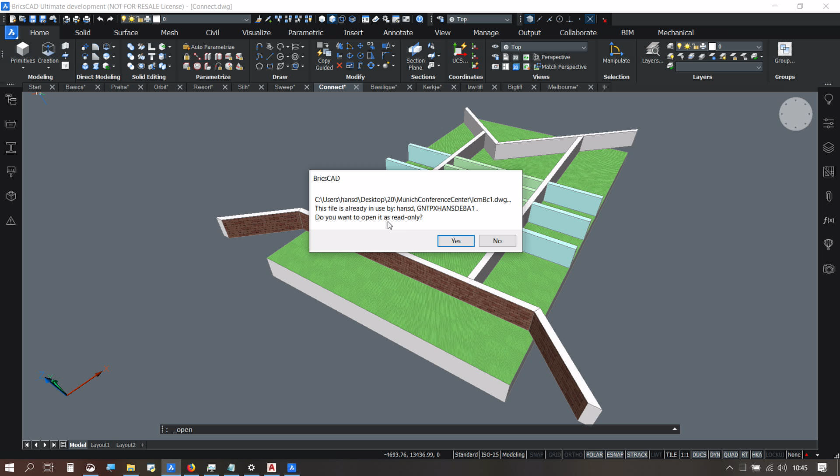And when I now open this same file, it's here. It says it's already in use. Yes, it's in use in the AutoCAD session, so it's really the same file. And I open it, and I get this message here at the bottom. It says that it started pre-processing the ReCap data, and it is translating it and re-indexing it to the BricsCAD format. The BricsCAD format is now using the same format as we are using for our virtual reality module.

And it allows very fast moving through the points. And also it allows nice stuff like dynamic point resizing. Why would that be important? I will show you in a moment. Now, while this indexing is going on, let's have a look at some bigger point clouds. This is a 1 billion point cloud, approximately. And just to make it easier to see some of the stuff, I will activate a section plane here. I'll do that again. Yeah, like this.

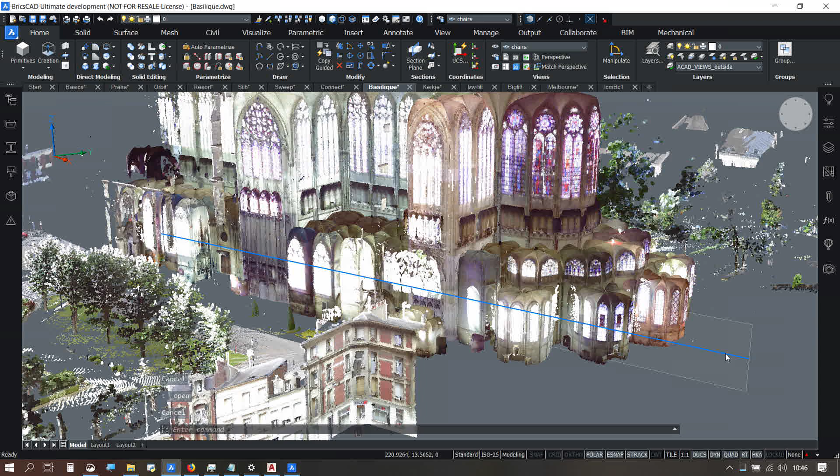So it's rather fast, you know, to clip away. And I can zoom in and move through that huge point set. I can do the same for other point clouds. So you see all these drawings, they are loaded in one session. So the workload on your processor is really minimal, while in the background there's also the other point cloud processing that is going on. Now, how hard is it also to clip that up?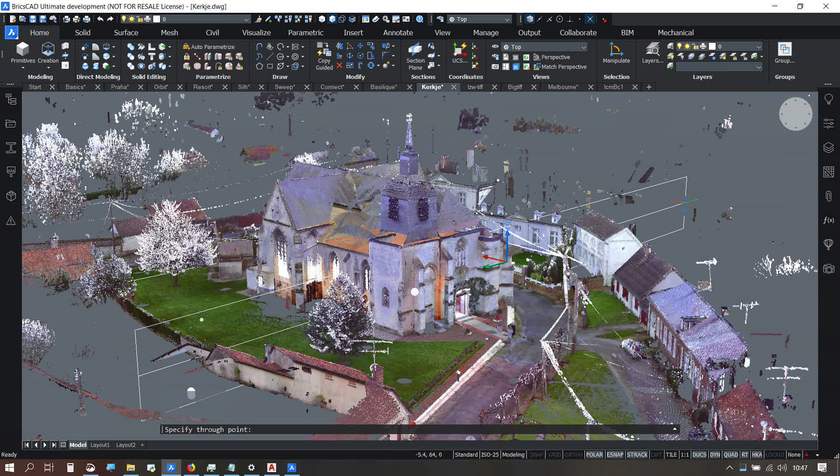Because in the other drawing, I had my section plane already there. Just look, I drag a section plane over here, and that's all it takes. It's very fast. And this is the dynamic point resizing, by the way, that you see going on. It looks for the optimal point size, because such point size is important.

If you look here, then what you see at the left side in AutoCAD is in fact that you are looking through a wall, because the point size is not very nicely chosen. The point size here is chosen just the same as in other locations. And when you have measured a lot of points, like in this area, there you get a nice view. But where the density of the measurement is less, then you're just looking through it, and it's very difficult to see what you get.

Oh, by the way, you see this message popping up. There's somebody coming to alert me that the point cloud pre-processing is ready. So we can go and have a look there. And is there something that strikes you in the quality of this image if you compare it with this one? It's an example of why it is important. And how come?

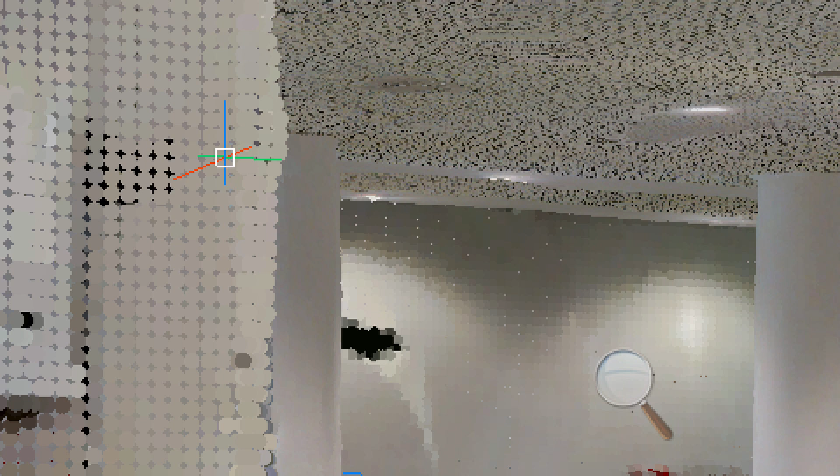Well, if we zoom in, then you see here we use very big pixels where there was no dense measurement. And here we use a half size in between, and here we have a lot of points, and there we can use small pixels. So in this blown up view, it allows you a bit better to see why that dynamic point resizing matters.

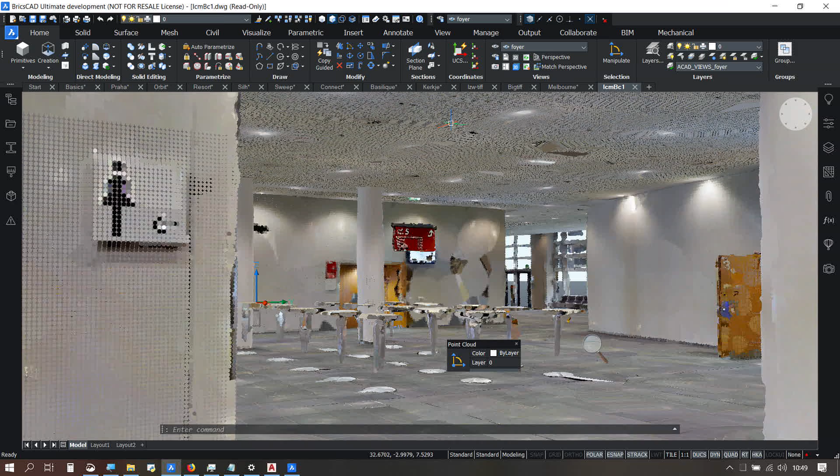Now, finally, along with the increased demand for big point cloud size, we get increased demand for big images that people want to attach, and also for very old formats that are still alive, like fax format, CCITT G4, I think it is called. That one we added support. We added support for virtually every TIFF variant that exists out there.

Let's just load such big TIFF. Well, first I will load a regular TIFF file. And similar to what you've seen with the point clouds, we give you a message that we start caching, we start indexing. We, in fact, create a multi-resolution format. We store the image at multiple resolutions, which greatly enhances the way you can work with it. While this conversion is on its way,

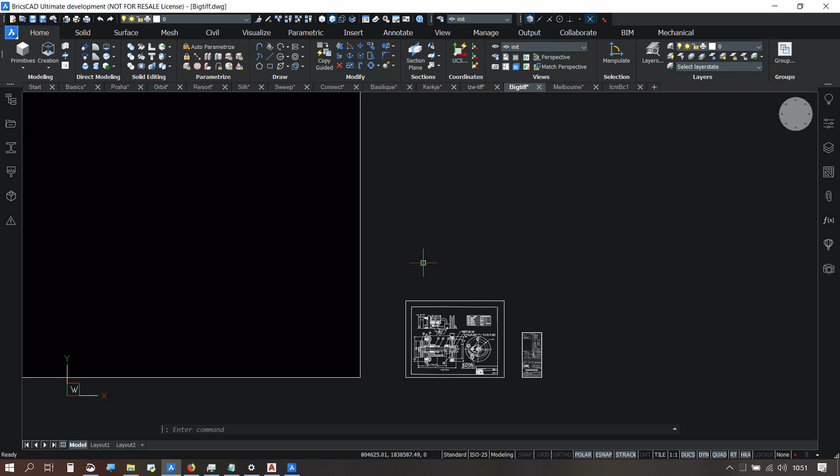let's have a look. These are the fax format things that we now support. And as I said, we also support BigTIFF. And what is BigTIFF? Well, has anybody heard about a petabyte? A petabyte is 1024 terabytes. So it's quite big. Now, a BigTIFF file holds 18,000 petabytes. Quite a lot. Now, here, what you see at the left is a BigTIFF image, the black thing.

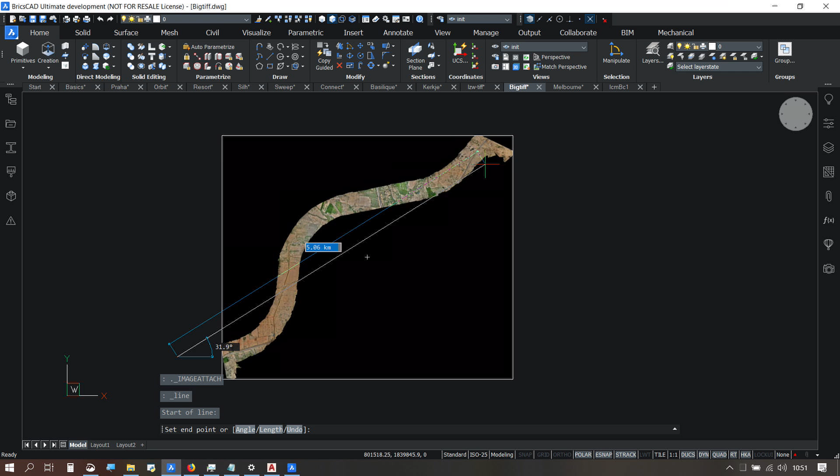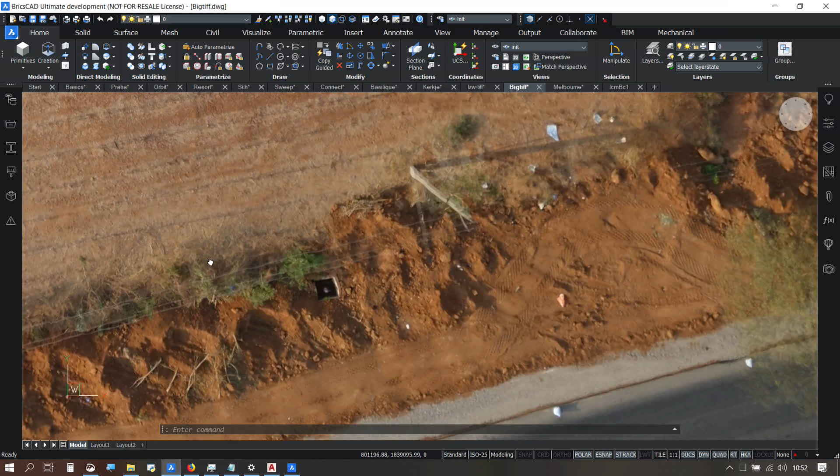I'm just zooming back. There's something coming. And I'll draw a line across. It's 5 point some kilometers, it's 3 miles, say. So now look at the density that these guys get, because this is made with drones, and these drones take thousands of images and they are stitched together. And look here, you see the tire marks, and you even see the electric wires on the poles, you can see them. So this is incredibly detailed.

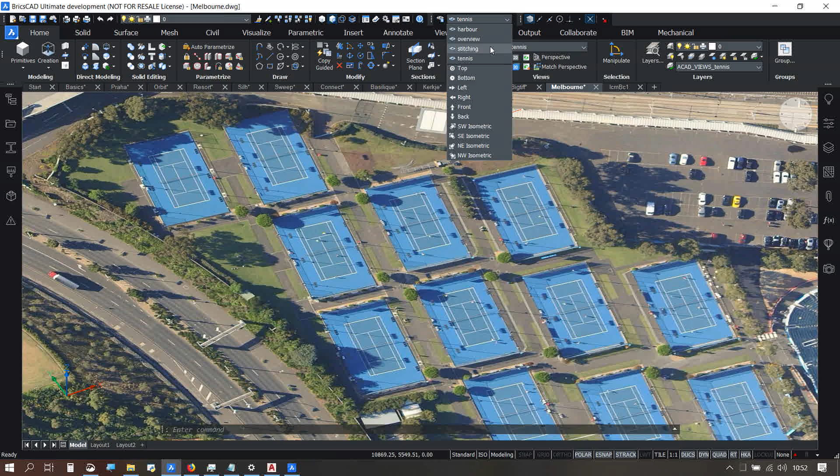And that's where we are going. It's the future, so we better be prepared. And you remember this image of Melbourne that we showed years ago? That's when we developed the technology that is behind it. And what we had to do to show you the power of that technology is stitching together hundreds of images. Here you can see the stitching.

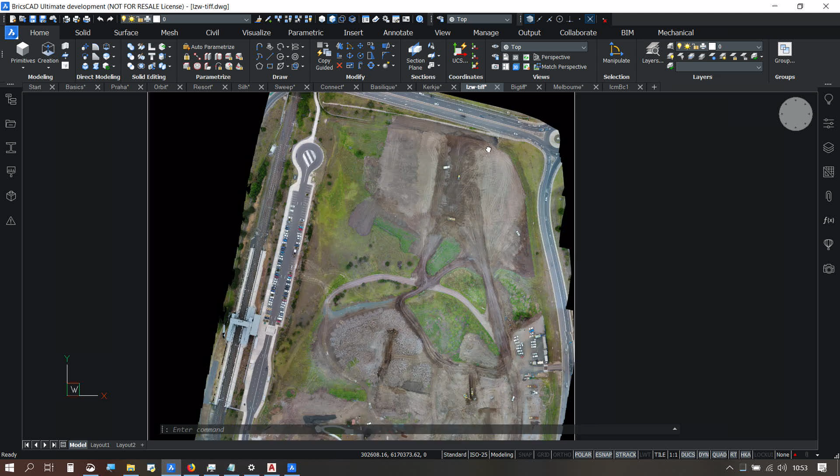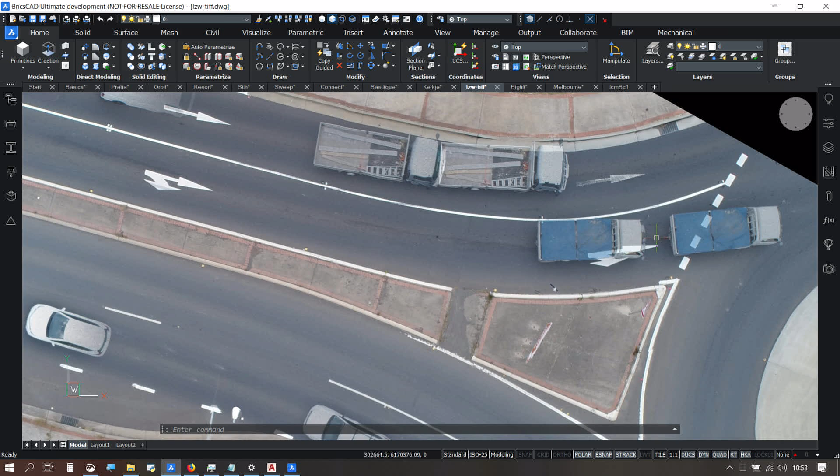So this is a 60 gigapixel image. You see the speed at which that is handled is just as fast as I can scroll my mouse. Now, same thing with BricsCAD. We're just preparing for the future. And meanwhile, the other one has been pre-processed and it's available. And it's also made with a drone, and these are multiple images stitched together, because it's unlikely that you would have two exactly the same cars there, or two exactly the same trucks. No, these are two different moments.

Okay, thank you for your attention. This is the future, where we're heading.

How cool is that? Hans de Bakker. So the core of BricsCAD, there's just a couple of things I want to say because he's too modest to say it. That was done on a laptop. What was running on that laptop? AutoCAD, V19, V20, all at the same time. No real special graphics card. It's all done in DWG. No proprietary formats. So is anybody else doing that in the market? Is anybody else doing the AI features that we've shown you? I haven't seen it. So what do you guys think of BricsCAD V20?

Very good. And one last thing before I hand it over to our next presenter is we're very proud of the fact that we actually went out and did the legwork and the research to speak to our customers, and we heard their points of pain, and that's in large measure where the specification for V20 came from. So let's continue that conversation.

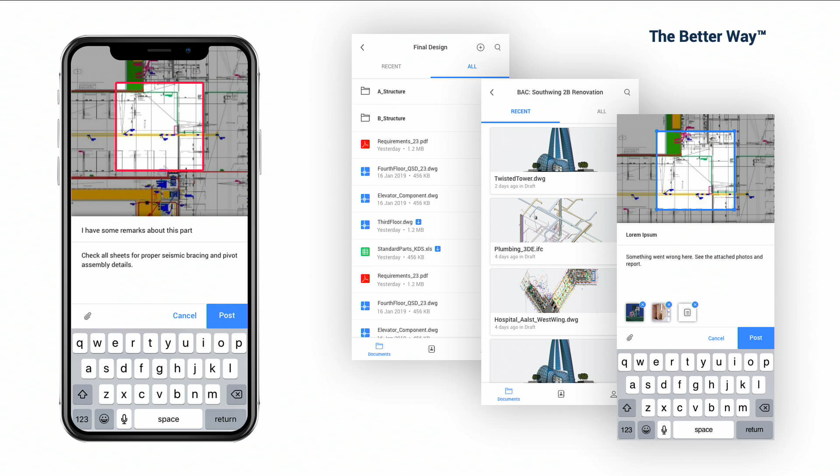The better way involves a mobile application where, as I said earlier, you can just go on-site, do what you have to do, have all the documents with you. You can run around, make sure everything is as designed, is as it says in the spec, and if it's not, you can immediately flag it and alert the people who need to be alerted to fix the issues.

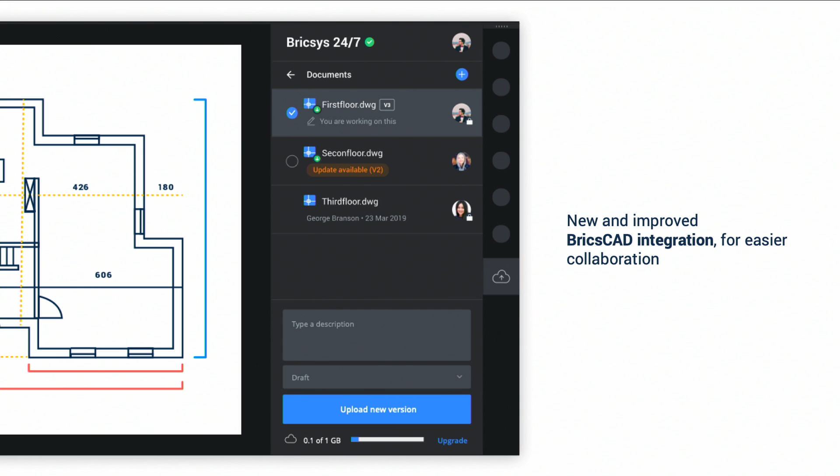A better way involves close integration with the design software that you're using, along with the collaboration software that you're using. So you can work in your trusted BricsCAD environment and immediately collaborate with your colleagues. And of course, a better way involves a fully featured cloud application where you can collaborate with whoever you need to collaborate to make sure that either your design process or the construction process finishes as successfully as possible so the customers are happy.

Now, to do this, we have on the one hand our enterprise offering, which is the one you might have already heard of. We're also introducing a new flavor of Bricsys 24/7, which is aimed toward design teams. Now, this new flavor contains all the features that are necessary for collaboration, and it looks a bit sleeker too, I'll admit. Shout out to our design and our front-end teams. They've been working very, very hard on this for the last year. They'll continue to work very hard on it for the coming months to make sure that all the cool stuff in the new version will be included in our enterprise offering as well.

Now, there's one small surprise actually. Eric mentioned it very briefly during his introduction, which is that the Bricsys 24/7 for design teams will be available for all BricsCAD V20 maintenance customers for free, which is pretty cool if you ask me.